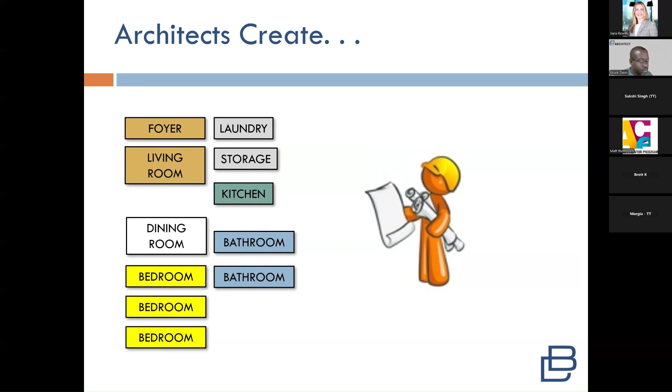This one is a list of rooms, very basic, something you'd understand as well. You start with a list of rooms, and from looking at the names of the rooms, you could tell this might become a residence of some sort. So we start by laying out the spaces, kind of formatting where we think things should go, where does it make sense.

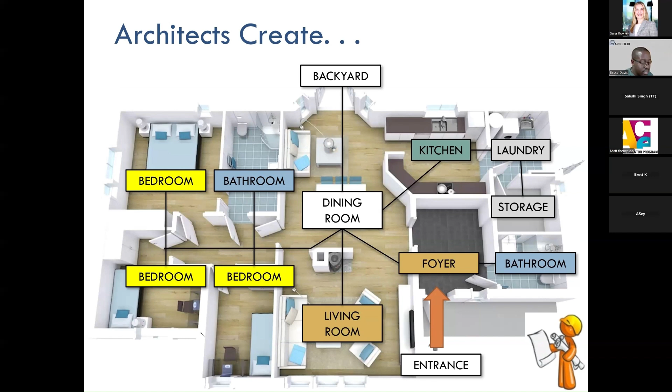And then we develop that into some sort of a design where we review it with the owner and get their input. And then we end up with the floor plan. So here you could see that the list of room names was transferred into some sort of a bubble diagram or adjacency diagram, and then a floor plan was developed.

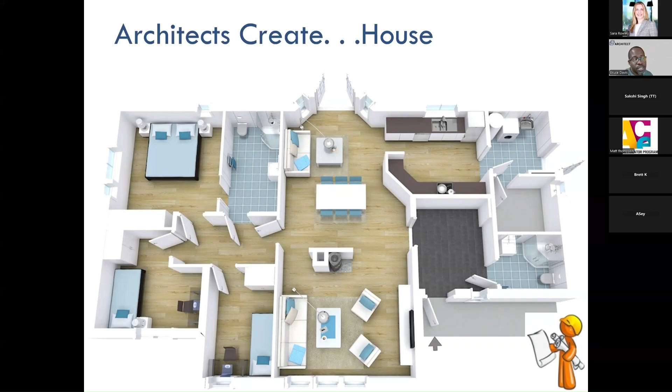So it takes a period of time. Various scales of projects could take different lengths of time, but smaller projects could take just a few weeks or maybe a few months to develop the different scales.

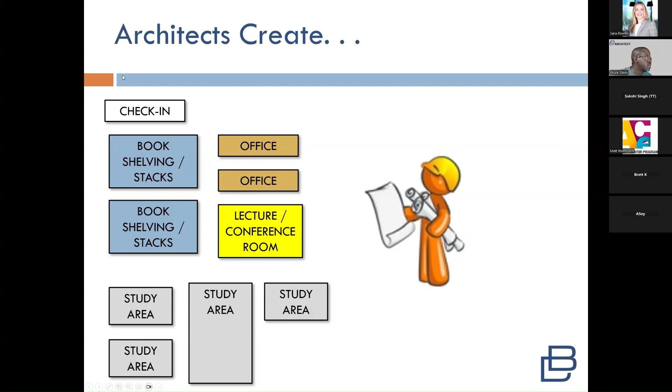This is another quick example. So this is office - you have lecture hall, conference room, study areas, book shelving, stacks, check-in. So this might develop itself into becoming like a library type space. That's generally what you would do with the project you'll be doing this year as well.

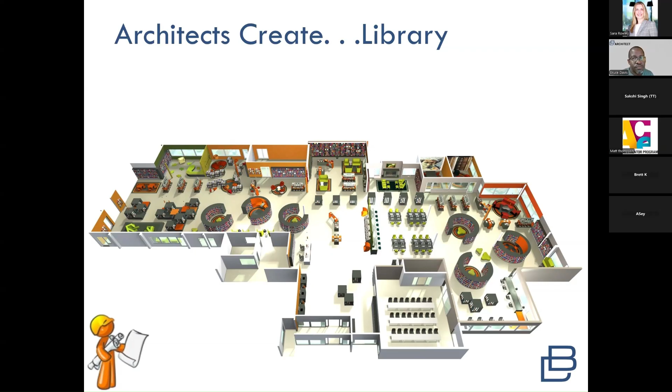And towards the end, I'll go over that as well and just quickly walk through the three different projects. The key thing, as you read any project description, is to highlight and see what are some of the key features this person is asking you to design for, or what are the key solutions they're asking you to come up with.

As an architect too, just like many careers, you could choose to specialize in certain areas. So if you are a person that loves anything to do with churches or worship centers, you could maybe work for a company that does churches or public spaces, auditorium type spaces, theaters. If you love residential, you could potentially work with a company that does residential, healthcare, or museums.

And so you have a wide variety of project types you could choose to specialize in when you become an architect. Much of that experience comes probably when you start working with a company that either specializes in something or has a big variety of project types. And a lot of it is just yourself - you choose to see and learn about the different careers to see what the options are, and then see what fits what you like doing the most. In the end, you just want to be comfortable and enjoy whatever path in architecture or the other AEC industries you choose.

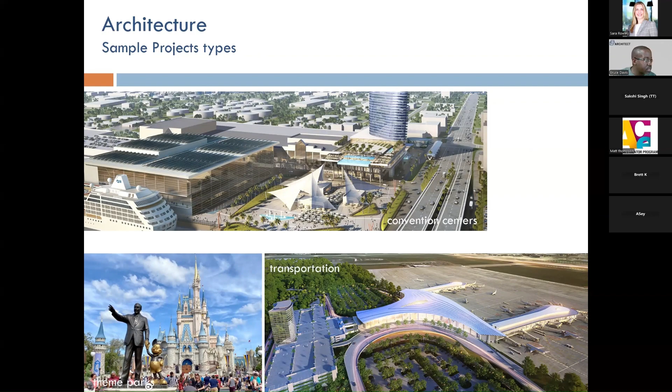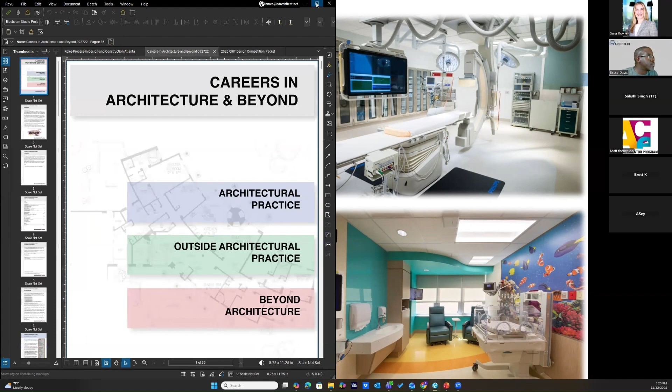Career snapshot. So I talked about healthcare architecture being a specialty you could choose to do as a career. Let me bring this slide up for a second. What I'll do is share this slideshow with the team so they could send it out to the schools who would be interested.

So this is a document I came across that talks about careers in architecture and beyond. You might be an architect that loves not just to design, but maybe to figure things out - maybe you're a person that's investigative. So you could probably be an architect that does research investigations of projects, like why buildings failed or why you have certain accidents, and you could possibly be an expert witness on certain legal teams. So you could take various angles as an architect, and what I'll do is provide this to you as a handout so you can see there are many different areas you could go as an architect.

And also as part of the presentation, I have another slide that goes over that too. Okay, so let's continue.

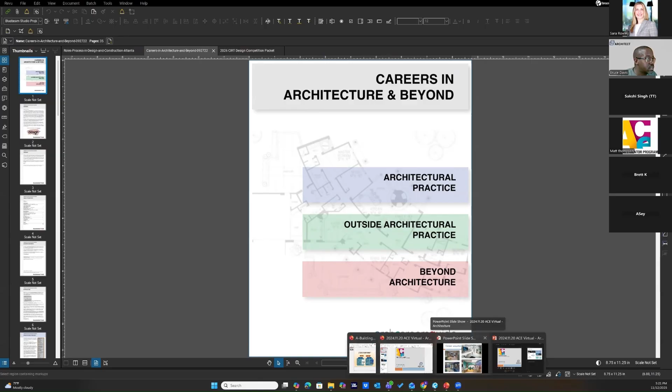Landscape architecture is architecture that deals with anything outside the building, like golf courses or parks. This one is in Hollywood, and there was a landscape architect involved in creating this experience. A lot of architecture is about creating an experience, so that when somebody visits that building or site, they feel a certain way about it.

In a park, you would expect to feel peace and quiet. If any of you have been to this site, or if you haven't, I'd encourage you to go. You can see how the landscape architect created different features that, even in a very car-oriented, vehicle-oriented area, create a peaceful environment in the middle of the park. I'd encourage you to check that out.

Some other career paths: technical architect, BIM manager, or specifications—the person who deals with all the paperwork, the specs for materials and equipment used in a project. You could also be an interior designer, a consultant, or a sustainability consultant. There are various roles as an architect, and that's one thing we hope you get out of this presentation—knowing there are many options for you if you choose to go that road.

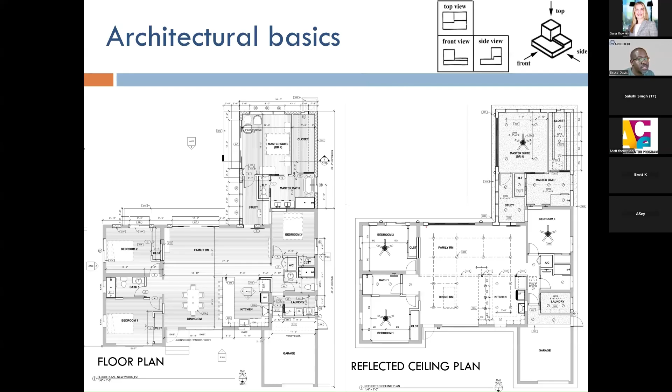Similarly, there's a plan view where you look up, called the reflected ceiling plan. In that view you'd see ceiling fans, light fixtures, and anything important about the ceiling design that needs to be built. It's a tool to communicate the design from the architect to the contractor and owner as they build the project and eventually move in.

Another part of the design package could be a plumbing plan. This would be developed more by the plumbing engineer, while the architect creates the structure of the floor plan. The engineers then work together on the layout for the infrastructure—the plumbing contractor handles all drawings relating to plumbing, water supply, and drainage for the building.

Then there's the electrical engineer, who comes up with requirements for all the light switches, light fixtures, and specs. If you have a generator or electrical panels, they locate those based on where the architect shows equipment in the plans—items that need electrical service, and things like that.

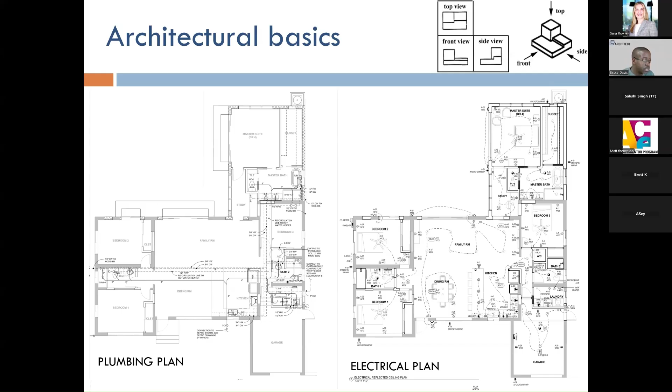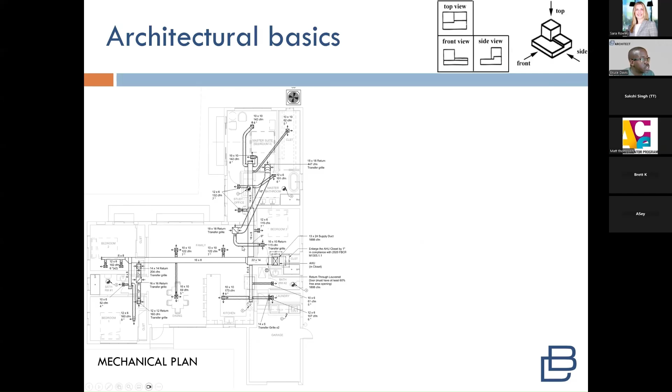This is a mechanical plan, showing the mechanical closet that serves the house and the distribution of ductwork above the ceiling, including how air gets back to the unit. You interact with these systems daily without seeing them—you just know the building feels cool. If it feels hot for some reason, that's when you start thinking about it, but when things function as they should, you typically don't think about it unless you're really interested.

So next time you go into even the building you're in right now, start looking around to see some of the things and imagine what's behind the walls, what's above the ceiling, and what's all concealed to give you a comfortable environment and what it feels like to be in that space that you're in.

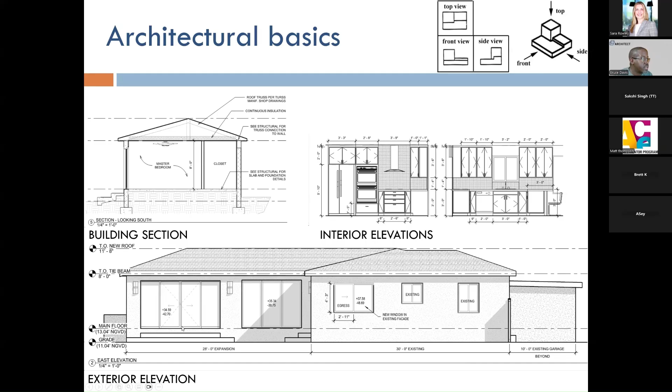Some of the software that we're using as architects, primarily we use for design, we use Revit primarily. And there's some that still use AutoCAD as well, depending on what the company prefers. The majority of firms are currently using Revit, which allows you to draw in 3D at the same time and work things out, clash detection and things like that.

Autodesk Tinkercad. This is something that's more elementary in terms of just getting kids, much younger kids, exposed to modeling and 3D design. But the good thing is that all of these are available for free for students from the manufacturer's website, free for download. So these are some resources that would be part of the presentation when you receive it.

So this link gives you some careers, talks about different careers for college graduated architects that you could go into, NCARB. And then I believe you may have access to ACE Mentor tools as well, where there's different activities up there for students that are part of ACE mentoring. AIA is a good resource as well, the American Institute of Architects, and they do have a lot of videos. If you're interested in becoming an architect, there's videos on the AIA website that tells you different things about architecture. You could just easily search them.

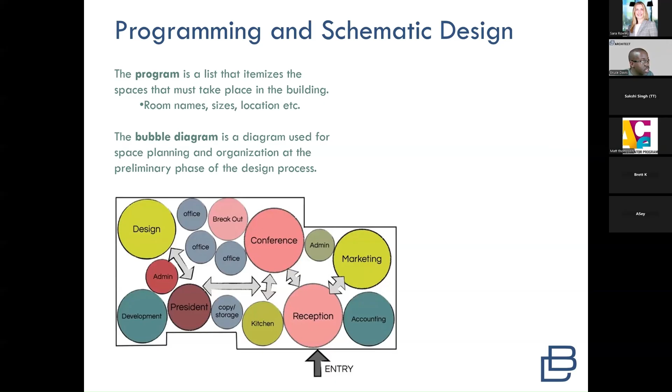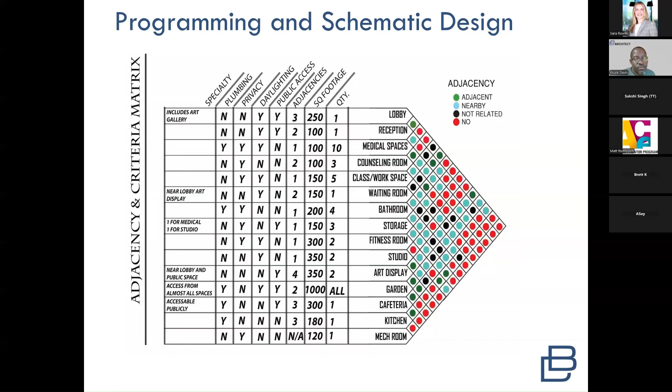They put a green dot there saying it needs to be adjacent to each other. Usually when you go to a building's main lobby, you'd expect to be greeted with a reception desk or somebody that gives you information on where to go next. So this is another tool you can use potentially. You just see which one works best for your teams as you develop your project.

I talked about this a little bit, the stages of design: pre-design, the client need identified, the site selection happens. Everything we build or design has a place, somewhere in the world. So whatever project you're deciding to do, for these competitions, you'd go through this more with your mentors later, but decide where, unless the program tells you it needs to be a specific spot. However you design this building, this project would have to have some relationship to the surrounding areas.

So one of the first projects you'll be designing is a net zero data center. As you read through the description of the project, make a habit of highlighting or underlining things that stand out to you that seem important, and make sure your project includes some of those features. So a net zero data center, the other one is a cultural destination.

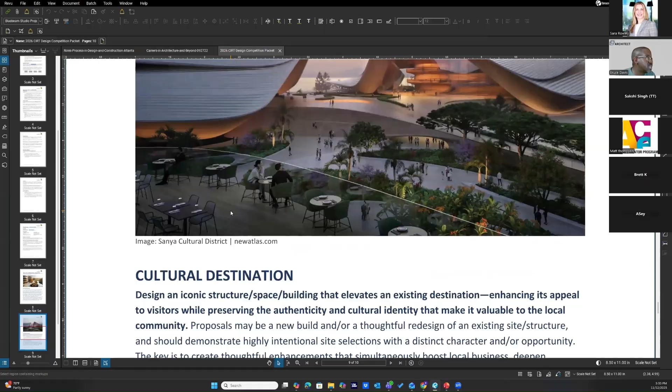Same thing, there's a description of what the project should include. The third one is a modular tech-enabled building. Same thing here. So one of the first things to do is decide where exactly this building is going to be located. What's the site? So that you could start responding to the surroundings.

Because a building has to have a place, a project has to have a place and fit in with who's going to be visiting that building and the people using it. That's all part of the pre-design phase. The design phase is where the architect starts meeting with the users and developing the project. Then the post-design, during construction, is where the project is built, inspected by the necessary agencies, and then turned over to the owner for occupancy.

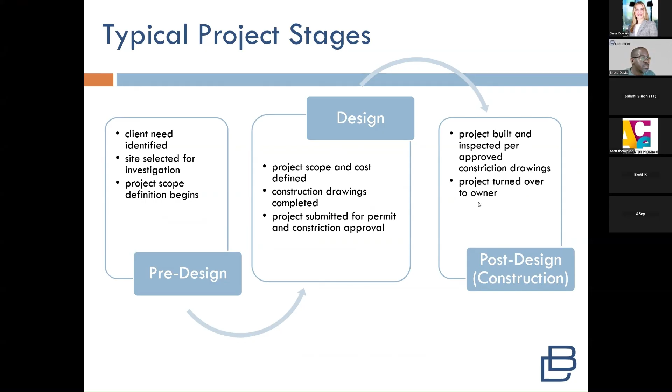Site analysis is a tool you would use once you decide where your building is going to be located. There are various methods of doing that. It could be graphical, where you just print out an image or Google Earth image of the site and start marking up the main streets, the sun path, where noise enters the site, and the surrounding areas. So you could probably do that graphically.

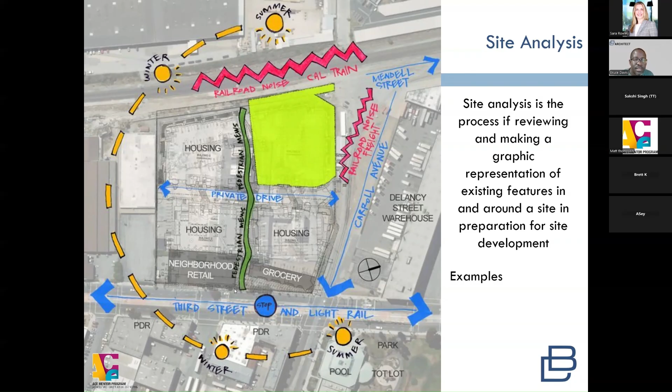It's better to do it at the very beginning, before you even start thinking of what the building is going to look like. It's better to get some of these things figured out upfront so that you know your building design or project is responding to the context in the best way it can. So you'll work with your mentors to develop something of this fashion, and then you could include it as part of your presentation towards the end.

Another thing we have to respond to as architects is zoning, because each area of a city, most developed cities, unless it's maybe a rural area that's not as developed, within a developed area you would have designated uses for land. So that would play a role in the site you select as well.

It could be a commercial zone primarily focused on commercial type buildings, or maybe residential. Nowadays you see a lot of mixed use developments, especially if you think of downtown Fort Lauderdale or something close to you, where you may have shops or restaurants at the ground floor, residences above, and maybe parking attached to that site.

So zoning, what that does is the city determines where within a developed area you can have certain uses that are compatible with each other. The main thing is to prevent the mixing of incompatible or non-compatible uses.

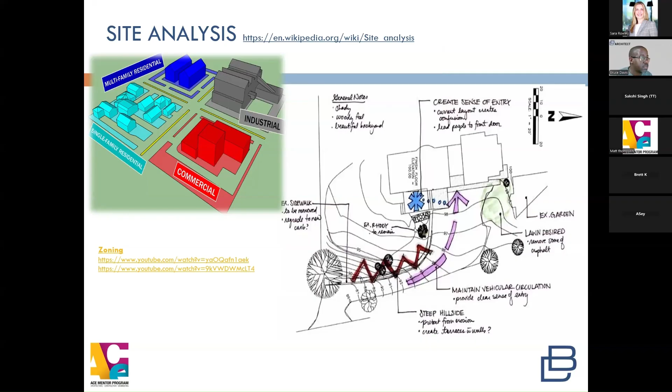Nobody would want an energy plant or high industrial use in the middle of where they live, because of pollution or noise that could affect people trying to sleep at night. That's an important thing we don't often think of, but it's established to preserve communities and make sure uses are compatible with each other. It's another example or feature of a site analysis.

It's just graphic. You have a legend that shows certain things, maybe pedestrian access. The thicker line may show where you have heavier pedestrian traffic, and the thinner yellow line shows areas of lower pedestrian traffic. Whatever legend or symbols you use, as long as you can understand it and it makes sense to you, it helps you decide what your building is gonna look like, how people are gonna get to it, and things like that.

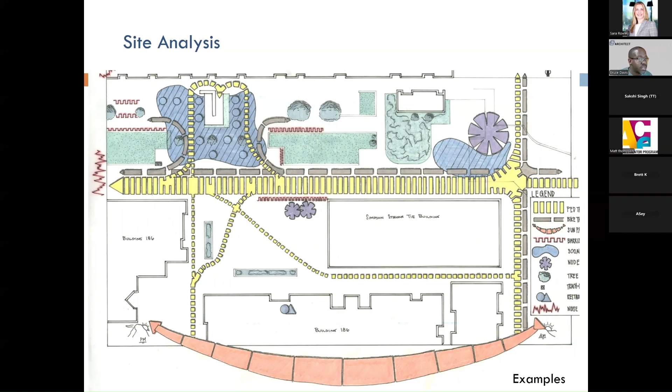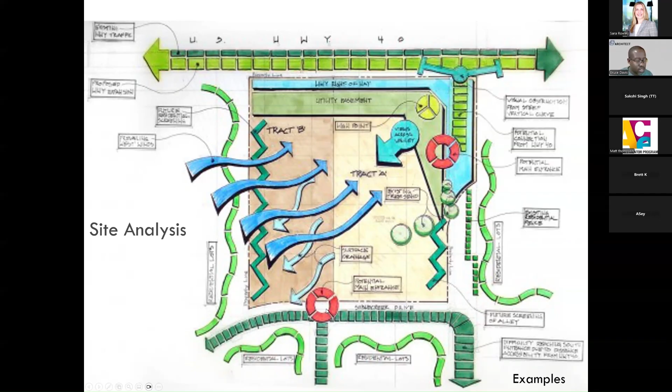This is another quick example. The blue lines, I believe, are showing prevailing winds. The green lines look like they're referring to a highway that crosses the top here, and then the project occurs within this brown area. So in this sketch, it was analyzing the things surrounding the site as it pertains to whatever project is proposed for that area.

One of the good things we can use nowadays is just searching online. You could use Google Maps, Google Earth, and visit a site. Most times the images are close, some might be a few months or a year old. But before you visit a site, you have the ability to visit it either through Google Maps or another map software, use Street View, and do measurements in real time. That's one I use often, Google Earth.

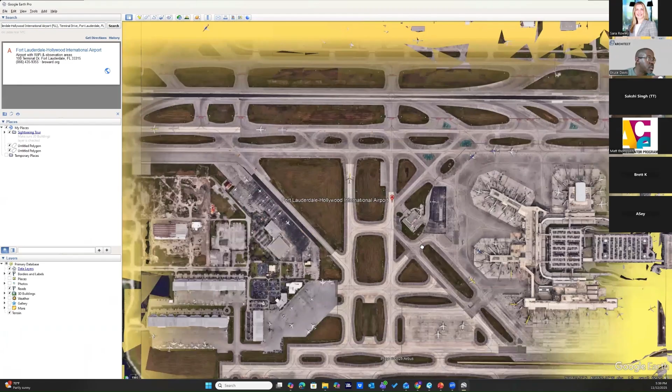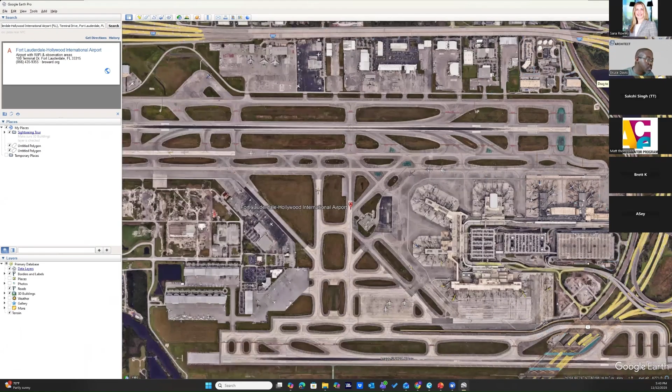It's free, you could download it as a desktop app, or use it on the web. You just type in where you want to go, say Fort Lauderdale Airport, and it takes you right there. With Google Earth, you could do measurements, street views, there's many things you could do there. This is something you may likely use as you develop your project, for instance to get the site overview and do your analysis with that. Google Earth is one thing I would recommend.

You also have the county, whichever county you reside in. Most cases they have a property appraiser's website where you could find information about the site, the size, the property cost. Then you could go to the county's planning and zoning website to see what that area is zoned for, checking the zoning and land use for your chosen site.

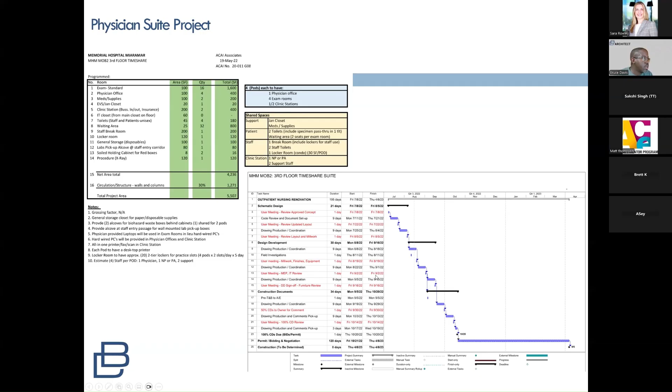Throughout the course of a project, we have to determine when it's going to start and what milestones we have to hit, then represent that to the client so we're all aware of the milestones, because the client may have a particular move-in date they need to occupy the project.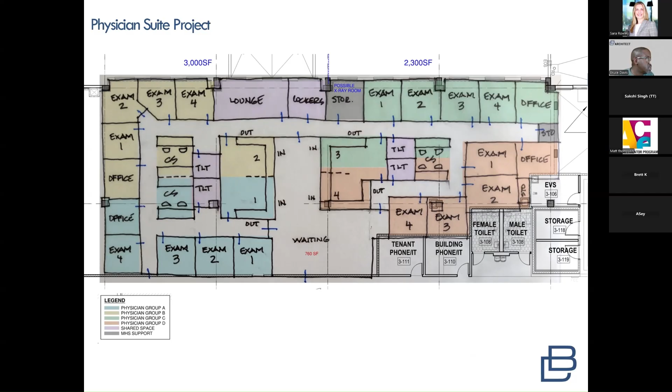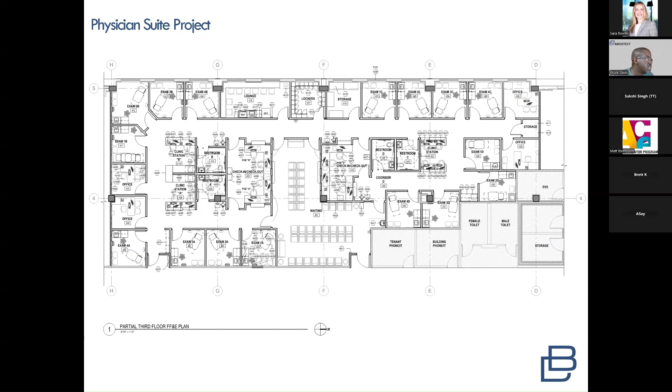So this is a sketch, an earlier sketch of this particular project. And then it changed over time, the design changed. It was a physician suite, a physician practice, and then we ended up designing the project based on, I think, the second sketch, second iteration that we came up with. And then the project is built. This was the layout that was done for that.

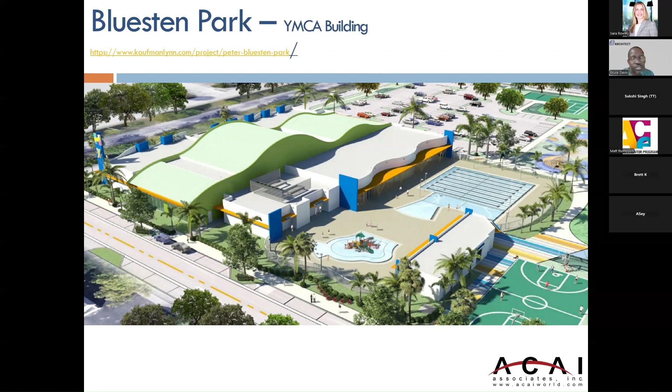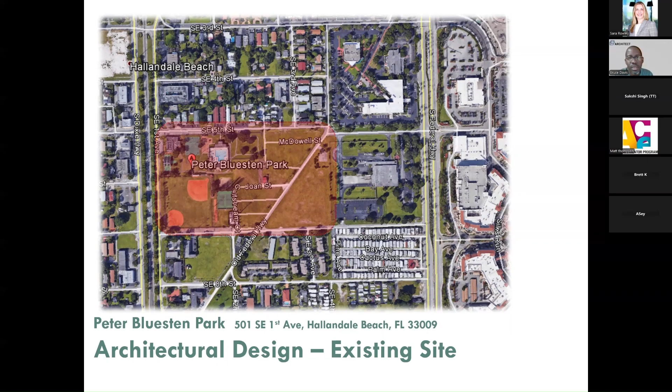These few other images, this is an older project with a prior firm, in the city of Hallandale Beach, and it went through the same process. There was a site that was existing, a park, but it was very small and it needed to be expanded, developed for the community. So the project went through, I think, a couple of years of pre-design where they had to have meetings with the community to get input. And then they went through the design process, and I think it was finished a couple of years ago.

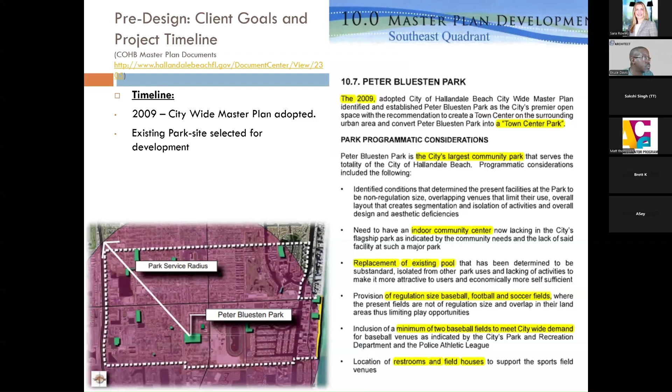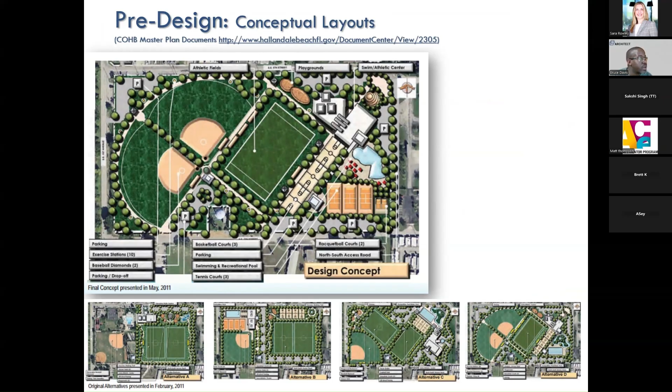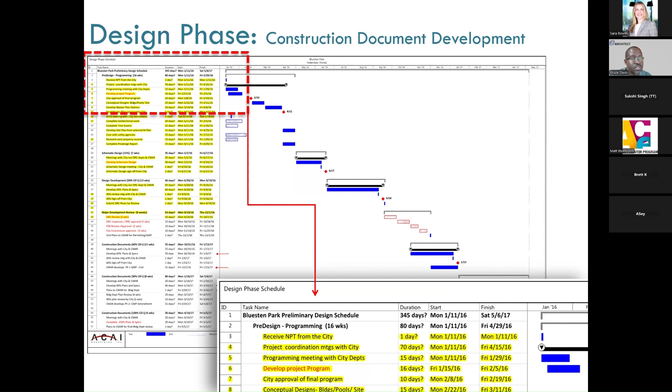This project also took a period of time to get through design and construction, which is represented here. This project also had schedules, and one of the deliverables, I believe, for the construction team as part of the project might be coming up with a construction schedule. So just as you have a construction schedule, you also have a design schedule that we need to meet.

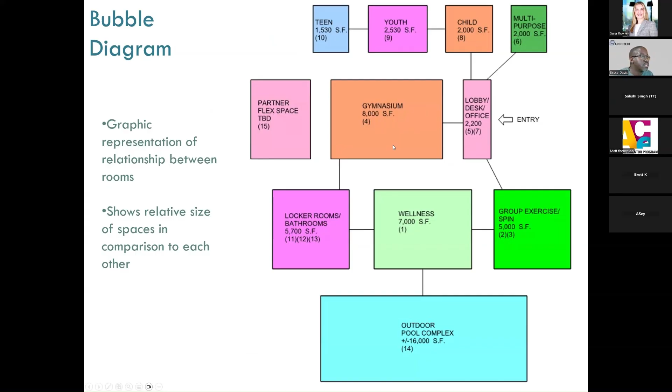We had a listing of rooms, the functions that needed to be part of it, the approximate sizes of these rooms, and then there were some preliminary bubble diagrams that were done, with the relative size of the rectangles related to the size of the space. So a lobby, which was going to be like 2,200 square feet, they did with a smaller rectangle as opposed to the gym, which is 8,000 square feet. And so the line is just showing that there needs to be a direct connection between the lobby and the gymnasium for this particular program.

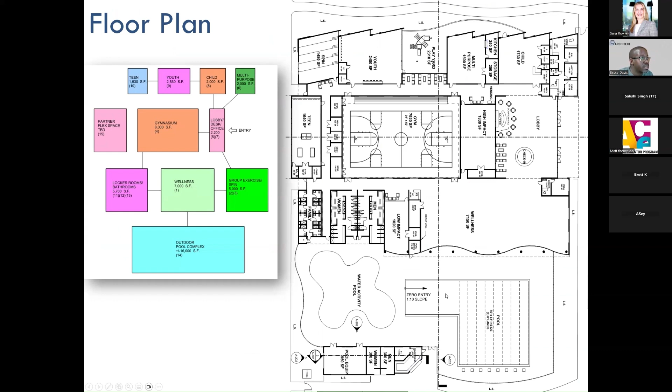So that developed itself from the bubble diagram, or adjacency matrix, into a floor plan that was developed, and then that became the actual layout for the building that was designed. So if any of the students on the line live in Hallandale or close to Hallandale, you might be able to visit that project.

And one of the things I'll quickly touch on, as far as sustainability, since that wasn't a particular focus of when I had prepared this initially. But for sustainability, the main component is just being mindful of the buildings that we design, to ensure that we limit the use of raw materials, the resources that we take from the environment. It needs to be easily replenished. We need to be able to reuse some areas where we're building in already developed areas, cities that may have existing buildings that could be repurposed. The idea of reusing a building rather than completely pushing it down and just creating a new use with the existing building. So anything that we could do to reduce the things that go to the landfill, basically.

So what I have here, and this is just from the web, for sustainability there's a number of different agencies that a design professional can consider, each with different criteria for energy efficient buildings. One of the main ones we have in the US is LEED, Leadership in Energy and Environmental Design. I'll probably include a link for this too. This is one of the ratings, or the sort of certification, that a building may go through, where you have different categories and different certification levels: certified, silver, gold, platinum. It goes from lowest to highest, in terms of a certified building having implemented a certain amount of sustainable practices, whereas a platinum building would have achieved the highest level of sustainability in terms of what could have been done for that particular building.

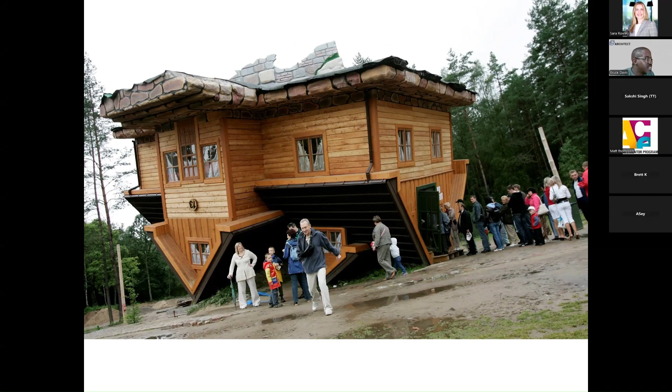Just a couple quick slides I'll go through. This is about some interesting architecture that's out there. I think there's a building similar to this up in Orlando - I think it's Ripley's, Believe It or Not. So an architect could do whimsical type designs, whether for parks or entertainment venues.

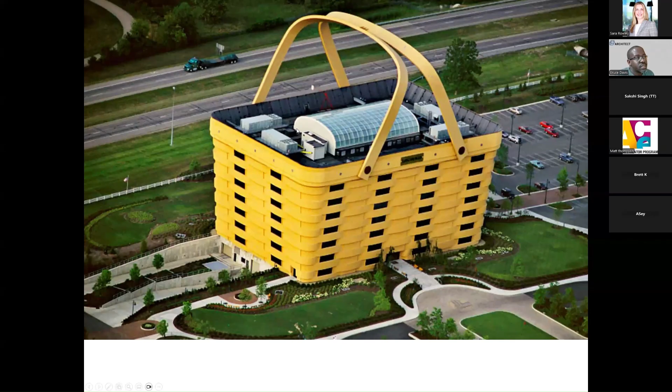This one was for a company that made bread baskets, so they actually had their building designed in the form of a bread basket.

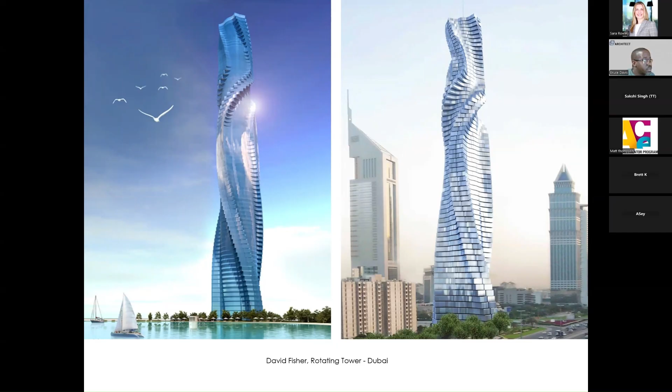This was in Dubai. It's a rotating tower, so each floor of the building slowly rotates along an axis.

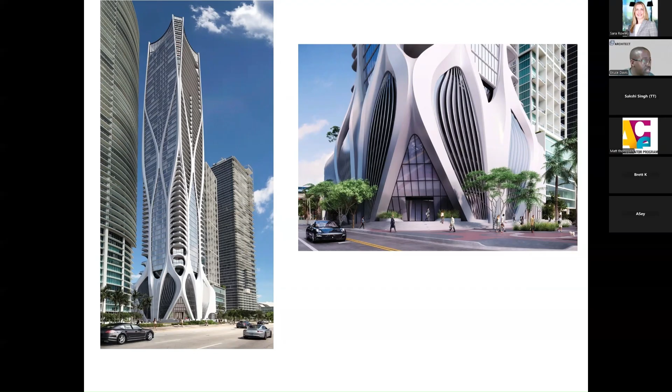As an architect, you could work on various project types and go into different career angles, but the important thing is you have to be prepared to work as a team with others and be a good team player. So with that, I'll leave it to Sakshi for the wrap up, and if you have any other questions for me.

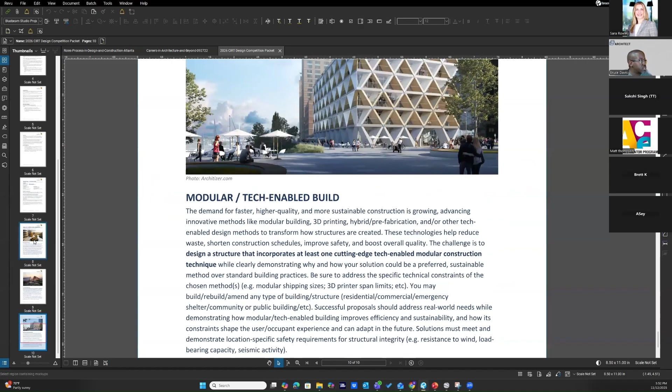The main thing would be to have a well thought out solution to whatever you decide, with a good reason as to why you chose that particular solution. So whichever of these three design challenges you decide to do, just have a good reason for selecting it, and that creates your foundation to start. If you show a good process for the rooms that are needed, the floor plans, with floor plan creation, you could start off just by sketching - you don't have to necessarily get into one of the drafting programs right away.

It's available, it's easily available, it's free to students, where you could get all of the Autodesk software. So some students in the past use AutoCAD to come up with the floor plan, some use SketchUp.

But the main thing is how you communicate the idea is important. So it's a combination for the deliverables. It will be a combination of a story, the project that you selected, where is it located, the floor plan.

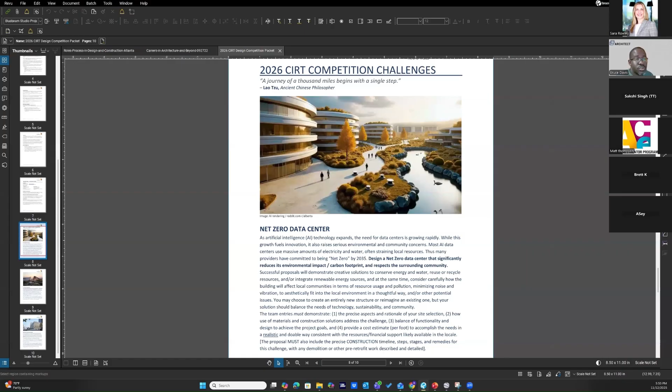So obviously you would have to have an architectural floor plan that shows an understanding that the building needs to be supported structurally. So if you have some interesting structural system, like for instance in this image, this particular facade is decorative, but it's also structural, has some structural elements too. So just have an understanding of the different systems involved: mechanical, electrical, plumbing, structural engineering, site design.

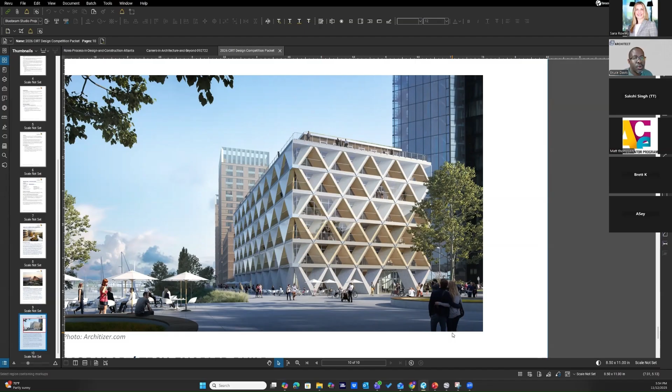And so you would get distributed to you the checklist of items that has to be part of the presentation. But all in all, I would say the main thing is to just have a compelling story as to why you selected the particular project as your design challenge, where it's located, and communicate effectively what it's going to look like. So in combination of floor plans, exterior views, elevations, and then the construction component too, because ACE is architecture, construction, engineering.

So we look at all components of the project. Just have a compelling story of how you present your PowerPoint. Nothing needs to be printed as a hard copy, though it would be beneficial if you think it's necessary to bring something printed to the final presentation. But most things are just electronic, where you have PDFs on a slideshow, but the main thing is just communicating your design solution. That's the easiest tip I would say.

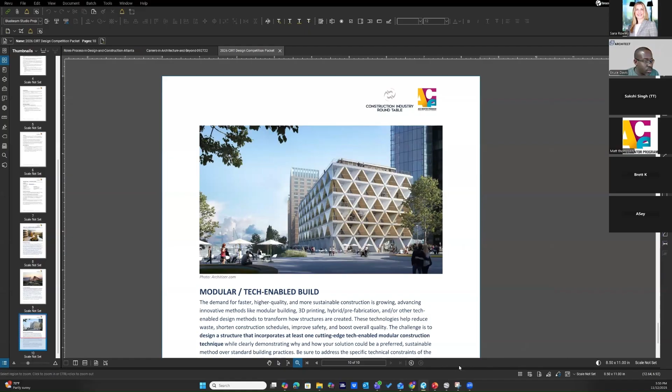Okay, thanks Bruce. About the questions that you shared, the mentors that are here can use those questions. This time, since we're doing things a little differently, we plan on watching this presentation in class with the students, and the purpose is that we have mentors available if they have any questions, so they can ask you and you can either answer them right away or reach out to Bruce or me, send me the questions, and we can coordinate sending you the answers.

So you can use those questions before the start of the presentation, and then at the end of the presentation, you can collect responses from the students in the class. That's one way of using it, even if the students are not getting graded for these questions like they have in the past. Or you can talk to the teacher if they would like to actually collect the responses and use them to provide a grade to the students. You can work this out with your individual school teacher.

All right, yeah, and any other pointers, Bruce? We just have a few more minutes. If no one else has any other questions, do you have any other pointers or tips for the particular project topics that we have this year, or any project topic that you recommend?

So I haven't delved into the three challenges closely as yet. I would say maybe just don't get caught up in the details of the floor plans. Sometimes the students may get caught up with just trying to get a perfect floor plan and don't spend enough time on developing the other stuff. Or they may jump into the floor plan layout too quickly without really thinking about where the building is located or what needs to be part of the building.